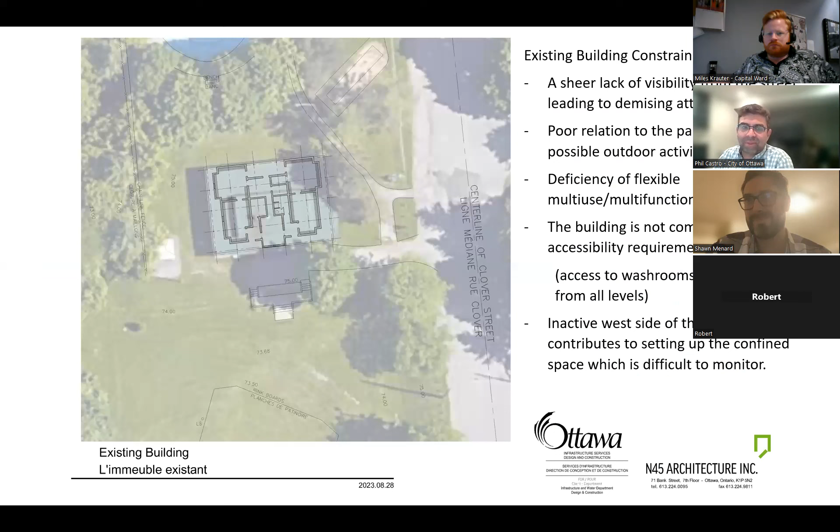From the park, the parking is almost non-existent along the edge of the road, and access to the pool to the north of the site, and the rink to the south. The site is sloped, which presents some challenges for accessibility, and I think we've addressed those, and we'll continue to look at that. We can switch to the next slide. We've worked on a lot of different options for this, and narrowed it down to three, which we think solve most of the issues with the site and access to the building, or access from the building to the park and recreation to the north, which is the pool.

There's some tennis courts, some play structures—a lot happening to the north of the site, and the rink in the winter to the south. The challenge for us was the connection to those existing facilities, and I think it's important. There's an opportunity to make a connection to the park around the site. It's really quite beautiful—the street is beautiful. There's the Sawmill Creek ravine to the west of the site.

But as a building on a site, it doesn't really respond to how buildings are used today. The space is compressed—internally, the ceiling heights aren't high, so it's not a particularly welcoming building, and certainly doesn't make use of natural light or access visually to the park.

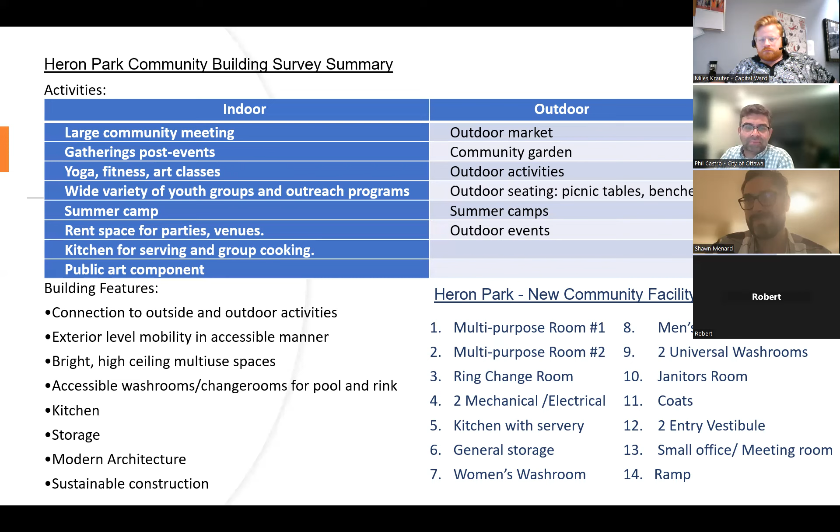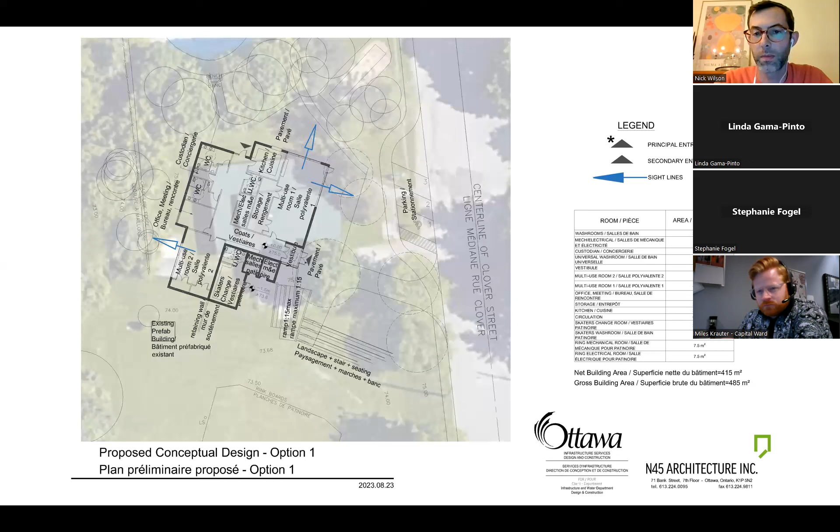If you want to raise your hand, by all means, raise your hand, because Nick, you nailed it, basically. If you look at the other ones, they sort of beg to have that kind of rollback door between them. So it was on the original plans, but like I said, they don't always do what they're supposed to do. They're expensive and they often break.

Yeah, I hear what you're saying there. You like constant maintenance and whatnot is not something we're after. So, which I kind of think of with the lobby as well. Do we need to have a separate lobby in the entrance, or is it better just to have bigger principal rooms? Lobbies have been hugely successful in all of our modern buildings.

It winds up being a stroller garage and a waiting room for parents. So we call it a lobby, but that doesn't mean there isn't a bench along it and hooks. So if there's an event going on, people will almost always wind up collecting in that lobby. And they do in some of our buildings that don't have those lobby spaces. Just as an example, there's a new field house in La Roche Park. Every single time I've been in there, and we've done multiple tours, we wind up spending the most time in the lobby. It's a truly bizarre thing that's been coming out, but that lobby space is almost disingenuous calling it a lobby. It's more like a de facto meeting room or gathering space, like a loading zone at the beginning.

Exactly. Yeah, cool. And then just two other quick comments and then I'll get out of the way. I think having seating there on the outside, close to the stairs, would be great. People do use the benches there a lot that overlook the field. I noticed that one of the options didn't have a seating area there. And then I think having the kitchen on the field side instead of the pool side would probably be most functional for the type of events that we tend to have.

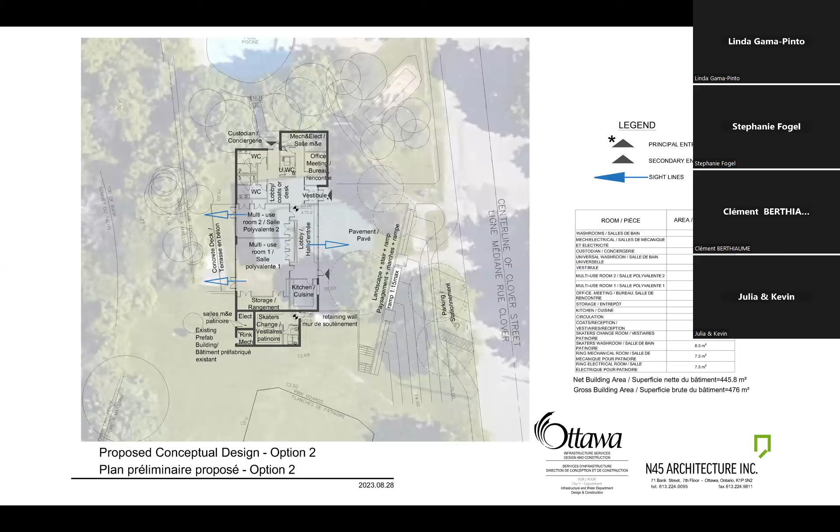So if the office was located in that corner - the southeast corner - with a window overlooking the rink, then the rink guard could sit in the office and keep an eye on the games and the skaters to ensure things are safe, and count participants without constantly having to go outside. That's kind of the orientation and a real necessity for this to be useful and functional for rink maintenance.

Also there isn't any indication of where the water supply would be, and that may be outside the scope of this, but we really need to ensure there's water supply both for flooding the rink and for the pool people, who need water supply to be able to clean the pool.

And finally, if we're doing this, it would be super to have an outdoor water fountain for people. Currently we have no water fountain or access to drinkable water when the building is closed, and that would be a lovely thing to have in the spring and fall when the building is closed.

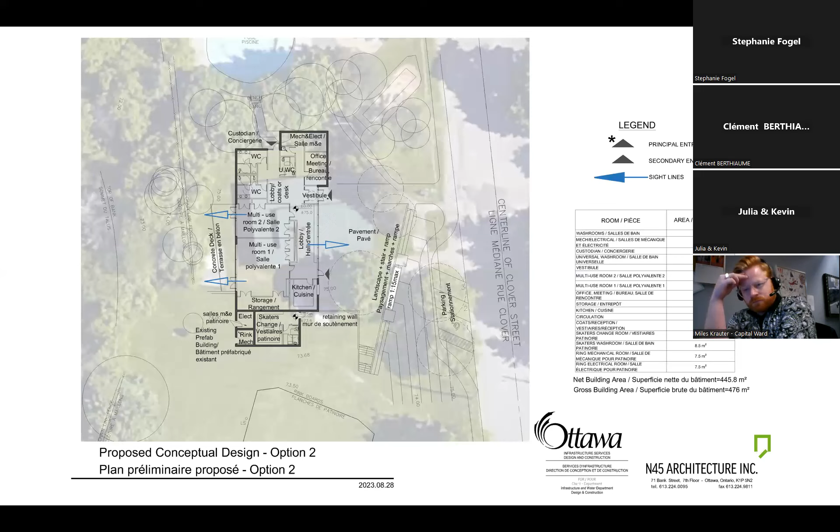That factors in the pool and the spaces, the multi-purpose rooms. And if we go with a universal washroom instead of what they provided there, then we would require even more space, I believe, to get the same number of water fixtures or water closets, toilets. So that would bump the cost up potentially a little bit as well - just something to think about.

Okay, Phil, I know there's more to address there, so back to you. Yeah sure, I mean the child toilets - I love that idea, I have 2 little ones myself, and if we can figure out how to do that, I definitely mark that down.

Room for the lockers - funny thing, you're not the first one to tell me that. The city staff member in charge of the lifeguards, that's actually what he said - he said, my lifeguards need lockers. And I said, oh okay, I guess currently they just kind of dump their stuff in there. They may actually have lockers as well, so either in the form of millwork or a more traditional metal locker, those are going to be included. Good catch. And while obviously the lifeguards would be using those during the day or while they're on duty, those would be available for public use at other times during the day.

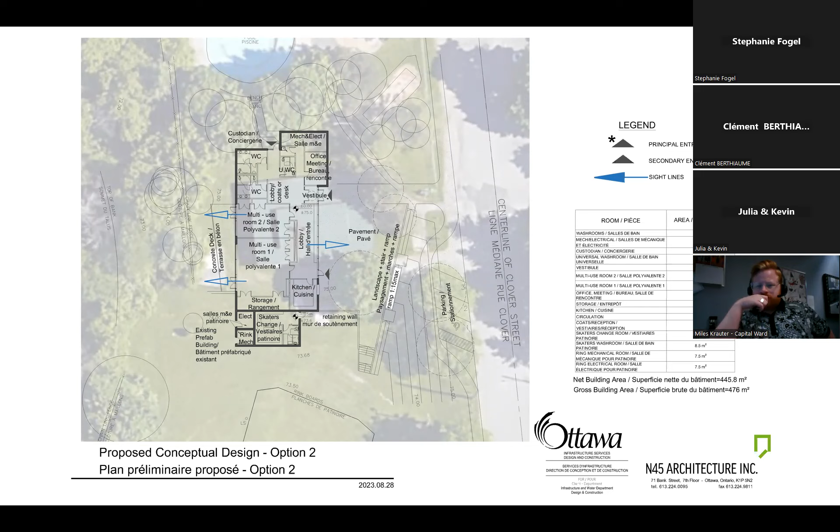The window to the office. So for the rink attendant, the window will be down in the change room. The rink attendant most likely won't be up top. They won't have a key to the entire field house, just a key to the skate change room, and we'll accommodate them with a window and a small desk to do homework, or if they want to bring a laptop or something else, whatever it is that they need.

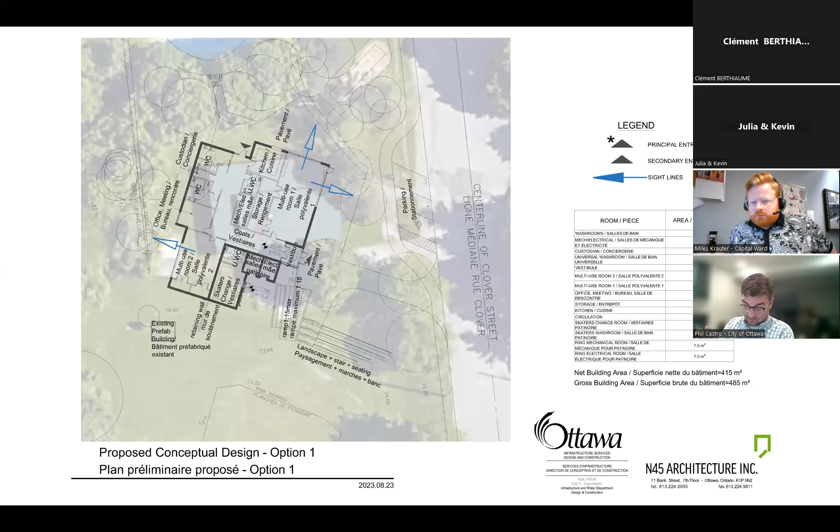And I think, yeah, that's it for Stephanie and Ben, but I did write everything down, and we're going to take all that forward. So thank you for that. Thank you, Phil, for that, and Stephanie and Ben for the thoughtful intervention as well.

Next on the speakers list, I can see Clément. Clément, please go ahead. Hi, thanks to everyone for all these great efforts.

I think perhaps it should be made more clear what the universal washroom is, as opposed to a single stall direct access. Stephanie made comments about that, so that people can have a clearer idea of, I guess, a greater capacity in those cases where, for example, the yoga classes might be of all one gender that might all want to use the washrooms all at once. So that's a bit of an aside there.

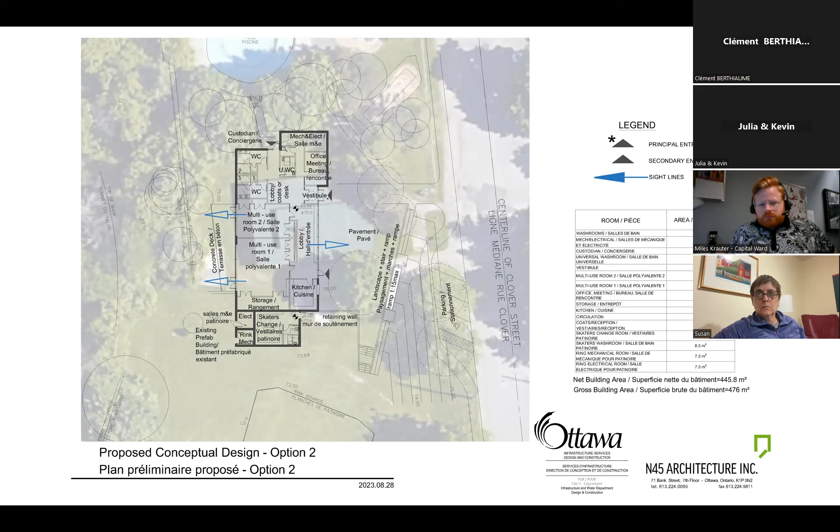In option 2, there was mention of a podium adjacent to the retaining wall for overview of the skating area. Is there also a podium intended in versions 1 and 3? And given that it might be available there in option 2, was there any thought to making that a bit bigger than would normally be the minimal size, in order to allow it to be used as a stage? Given the natural stadium on the east side of the whole extent of Clover, as a possible eventual use for youth plays or whatever other activities they might want to have there, for small concerts or whatever.

Also, there hasn't been any mention of this, although Jay had very good comments about using this as a destination in instances of problem weather. Is the intent of this building to be one that is resilient and can resist intemperate or extreme weather?

And has any thought been given in the eventual harder fixed design to taking advantage of the south facing clear treeless areas of the rink and the field, in order to be able to harvest either solar from photovoltaic or a little bit of extra heat? If we're looking at heat pumps for the heating system, number one, is it going to be air conditioning? And if it is going to be air conditioned, then if heat pumps are going to be used for heat in the winter, we can maybe take advantage of making the pool season longer by, in the summertime, using the heat pump to dump excess heat directly into the pool.

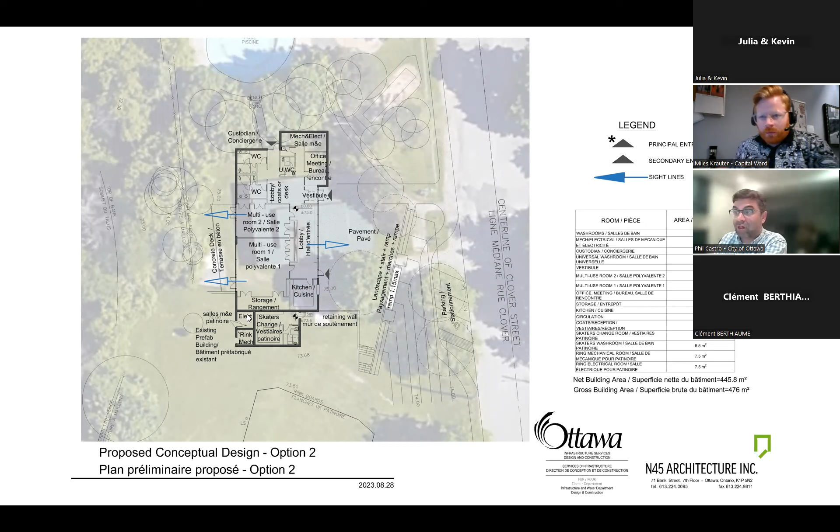I think we'll be able to catch sunlight from the second story coming in from the south across the building, just due to the differences in grade change. I'm not sure exactly where those windows will land. In the option we're looking at now, there's a closet that would be in the way, but in some of the other options it would work a little better.

Also, there's an opportunity for a green audit. The city has some funding available for buildings to be audited for green features before construction. So we'll most likely take advantage of that to see what else we can do to incorporate green features in the building from the get-go, and also future-proof it.

Going back to the rooftop, unfortunately, as you probably know, the waterproofing can become cost prohibitive. If we were to use the roof for the skate change area, it would have to be appropriately waterproofed, appropriately decked, and a railing would have to be incorporated. All of those things may seem small, but they quickly add up to a very large expense. That's why, when we were discussing things, Phil, we decided to ditch the idea of a waterproofed deck over the change area.

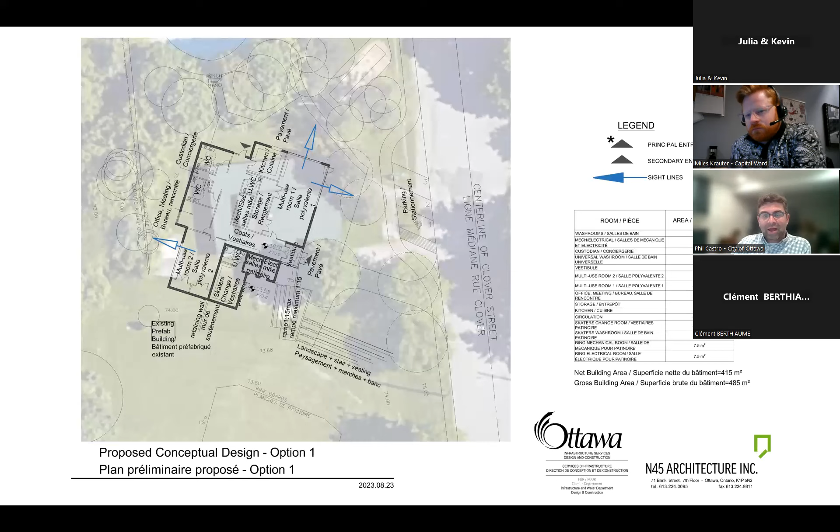It was mentioned, I think by John or Robert, about that podium area on the exterior, where there's kind of a retaining wall in this area looking down. Yeah, I noted that one too. That one caught my eye as well.

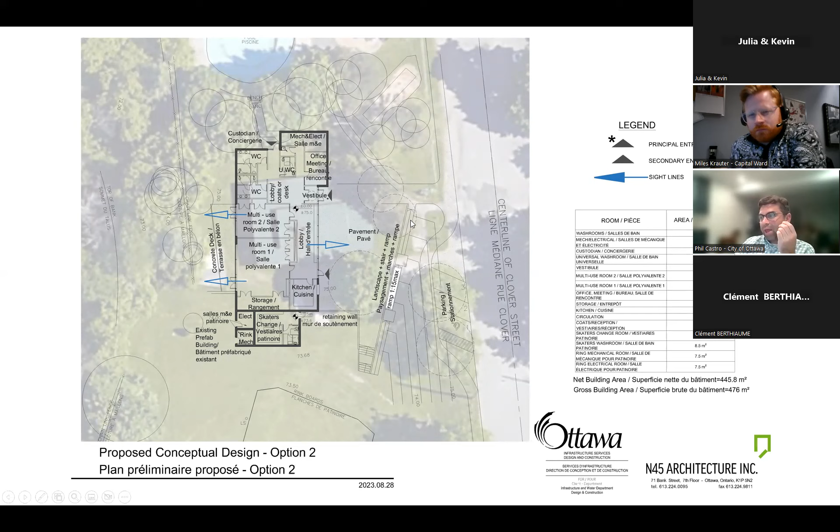The ramp may not be the best ramp, but the use of that retaining wall is nice. In one of the other options, there's kind of an amphitheater effect, where the ramp zigzags back and forth with large steps in between, creating a natural amphitheater seating. Both are appealing.

The thought is there, a bit of tweaking would take care of that right away. Thanks for that helpful exchange, Phil and Clément.

Julia and Kevin, I see your hand next. After we hear from you, I'll also look at some of the comments in the chat. Phil, I know you can save those on your end, and we can too, so you can review them later. I'll provide a summary of anything we've missed. Julia and Kevin, please go ahead.

Hi, so I have a question, then I have some comments. The first question is, how much bigger is this supposed to be than the existing field house?

That's a great question. Robert, I don't know if you're still there, but I was hoping you could also touch on the size of these multi-use rooms. Yeah, that's kind of where I was going to go with this too. I'm still here. I can't tell you exactly how much bigger it is, but it is bigger.

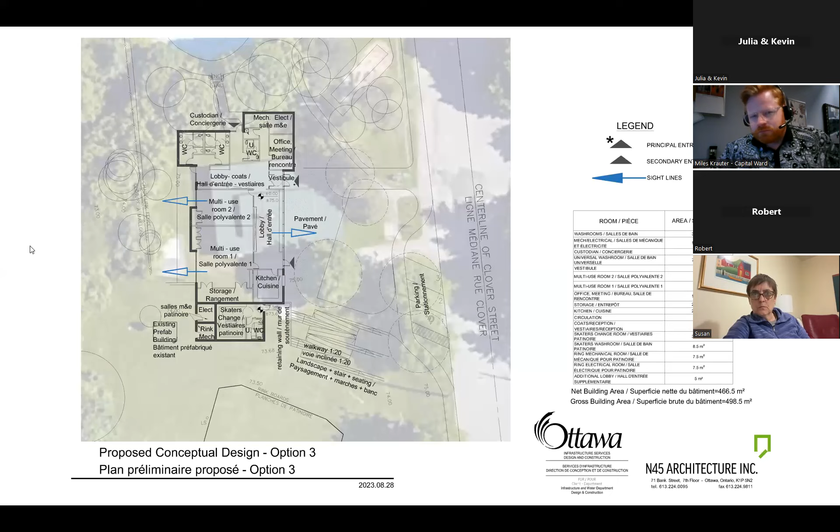Room number 2, in loose chairs in rows with a speaker at one end, could seat about 68 people, and if seated at tables, about 50 people. So they're good sized rooms—they may look small, but they're actually very efficient and generous in size.

If I could comment on the washrooms, if you look at any one of the universal washrooms, it's just slightly smaller than half of a typical washroom. From a building code perspective, we have to design to the number of people that could use the building, so we have 3 fixtures per sex. We would need considerably larger area to accommodate universal washrooms, and they all would have to be accessible.

Okay, and Julia and Kevin, I think there was some comments beyond those questions, so please go ahead.

Yes, so my first comment is I think the angle of option 1 is kind of interesting, and I've heard that one reduces tree loss the most. But my question would be, does that angle have anything to do with anything else, or is it just a random angle picked and dropped onto the site? How does that building interact with the site on that angle?

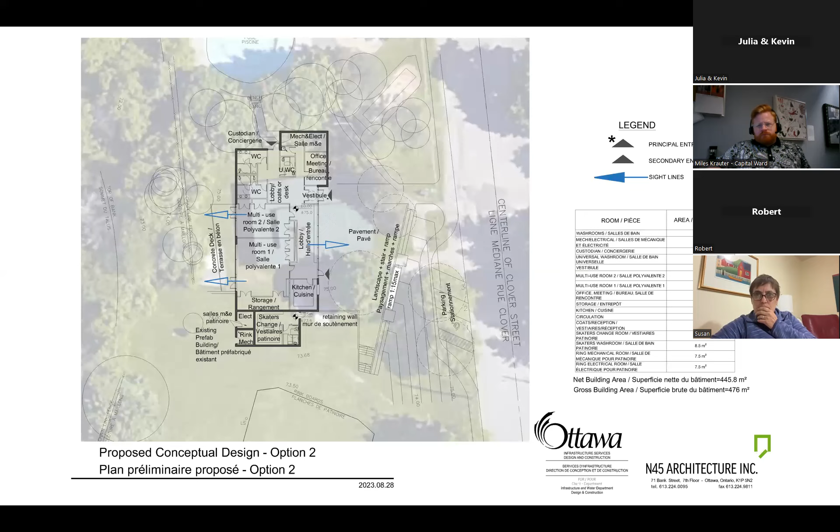Okay, Phil, did you want to comment on any of that before we move on?

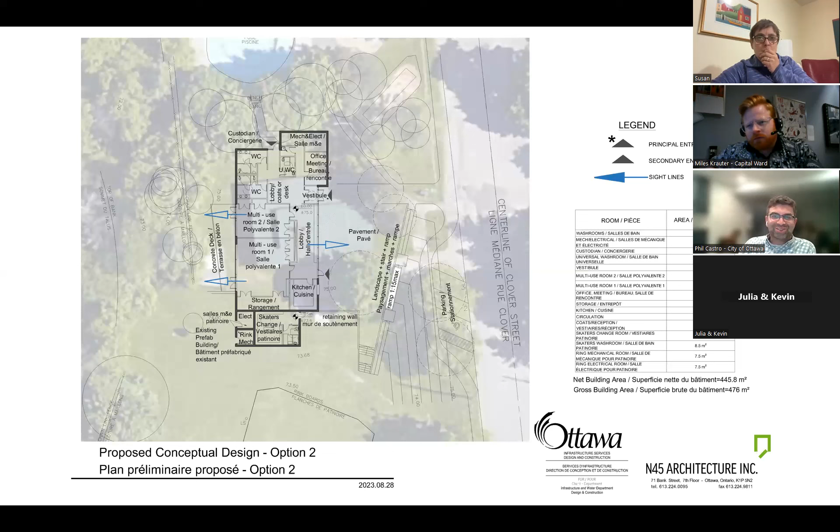Well, you made me think of something: barbecue storage. I was imagining the barbecue happening, and then where the heck does this barbecue go? So I've made a note of that. The windows, I mean, to Sawmill Creek, it's one of those major components we're going to really have to put some thought into.

I also love that you use the lens of: it's important how we use the building now, but how are we going to use the building in the future? City staff was very interested as well in what the future of this building would hold. If we're starting to do all of this, what are the limitations of this building? We're hoping there won't be that many limitations for what the uses of the building can be, which is kind of what this whole planning process is all about.

The angle, that's a great question. Robert, if you're still there, was that to avoid the trees? Was that a conscious effort? It was absolutely. The other two schemes are longer, and they cut in more into the north end of the site. If you look at scheme one, option one, it kind of nestles in amongst all those trees, so it's pretty nice. Unfortunately, we didn't put a north arrow on this site plan, and generally it's to the north, so it's slightly north, southwest a little bit.

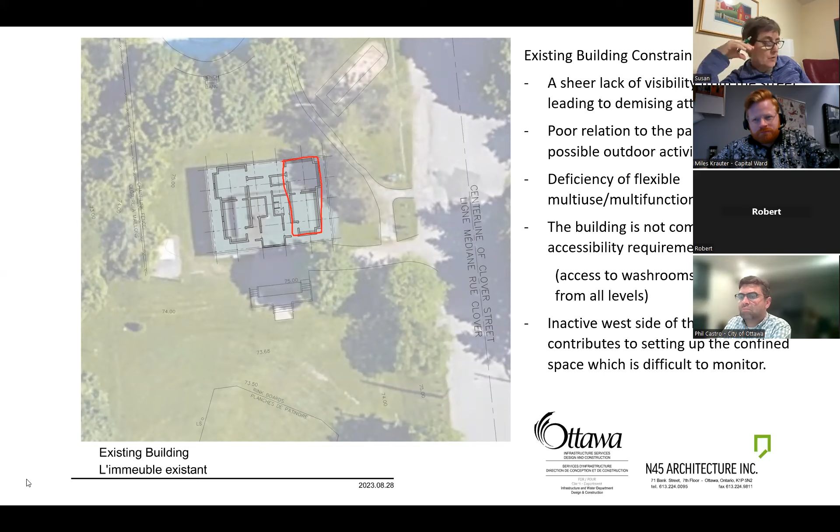Oh, well, by code, up to 100 in loose chairs like you'd put up in a classroom. Okay, because I think the comments around the one meeting room are a result of the small meeting rooms we have and the need for a large meeting room to accommodate 40 or upward people, because our maximum AGM numbers were under 40, and we usually hold that at another venue because we can't fit everybody into the current field house. So I wanted to clarify that, because it seems like quite a big space if you can put 100 or 90 people in.

The other comment is with respect to fewer washrooms. Again, I think those are stemming from the need to maximize the amount of meeting space we have, because the meeting space is really important. That's where I think the current field house doesn't meet our needs the most, trying to get a space big enough to accommodate even our current meetings, let alone future meetings, as Julia said.

My other comment was in terms of the office meeting space, and again this is generated from trying to maximize general meeting space - I'm wondering, and people please react, do we really need a meeting room or an office room? Or could that, on the design, be a third meeting room with some office space for storage, like a few file cabinets?

And that's the idea, Susan. Sorry to jump in - so when I met with other parks and facilities staff, essentially that is what may wind up becoming the locker room. So yes, but there's the potential for two different city storage uses in the future.

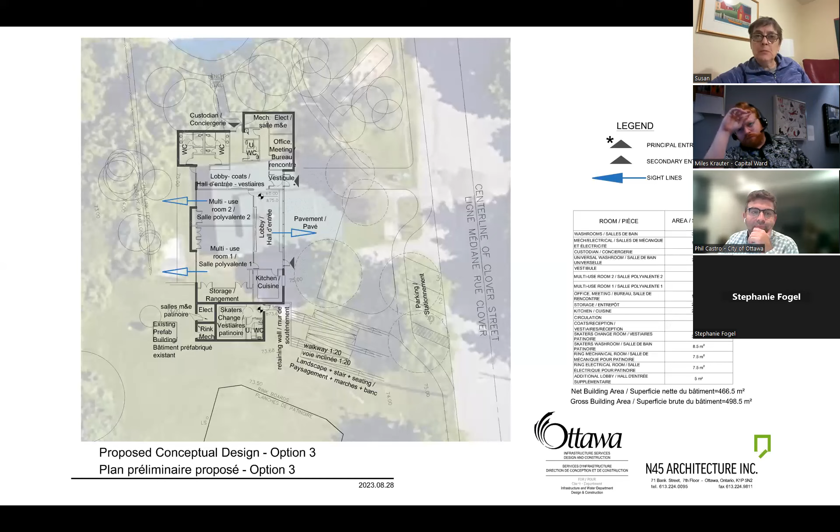And so if that were to be a third meeting room, how many people might that accommodate? So that little one looks to be about 20 square meters - that's pretty big. I mean, once lockers and millwork go in, if it's cubbies and not like a metal locker with a lock, or just cubbies with a little box on the bottom for shoes, that begins to eat the space away.

But that may be what winds up happening - it just winds up being a desk with these cubbies that go around the room, not necessarily a change room, just more a personal belonging storage room. Okay, and the other question I had was, since it's on two different levels, is it possible to build the top level out over the skating change room area, to expand the footprint of the top level?

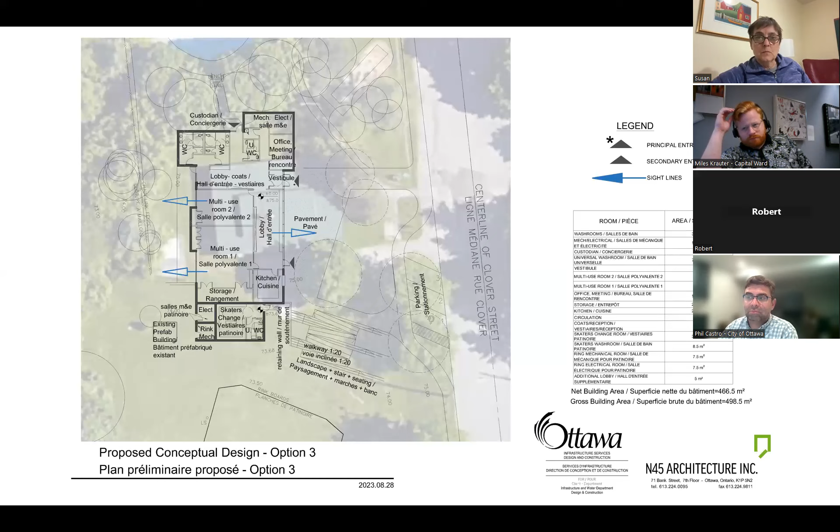Well, it's Robert speaking. So nothing's impossible, but there's only about a 5-foot grade difference. So the upper level would have to go up, probably 5 or 6 feet above where it currently is. So you'd be having to ramp up into the building. Right, so it doesn't really make sense.

Okay, so that kind of matches my earlier comment, where we don't know where the windows on the second floor are going to wind up, because we don't know how tall that lower area is going to be exactly. It might be kind of like a half story.

Is that possible then, if that's maybe out of the question, to make that into some kind of a balcony or canopy, like a place where people can go outside from one of the meeting rooms, to use that as a deck or a viewing area that's outside?

Well, again, it's accessibility. So the roof of the skates change vestibule or room would be higher than the existing grade, so you'd have to go up to it to use it as a deck. And to go up to it, we would need a stair and an elevator to make it accessible. Right, and we had talked about in an earlier meeting about trying to avoid elevators. Yeah, because of the cost, they're very expensive.

Okay, but I was going to just mention, if you went back to schemes 2 or 3, Phil - I know the preference is scheme 1, but when I look at the office meeting room, the discussion about using it as a meeting room, in terms of efficiency, you can slap my hands if you want.

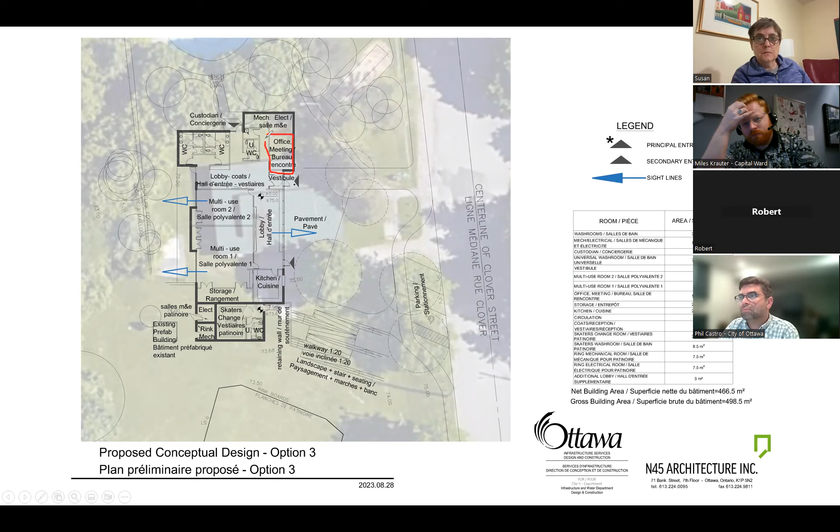If I had the mechanical and electrical room accessed from inside the meeting room and the janitor's closet, then I would capture the corridor as part of the meeting room space. That room would get even bigger.

Oh, you mean this? Well, the whole corridor, actually. Oh, because the water closet's on the... oh yeah, okay. So I would capture all of that into the office meeting area. So the room is about 200 square feet. We'd be adding another 75 square feet to it. Becomes a pretty nice room.

So then you'd have room for lockers and a meeting table, and a slop sink in the corner, and you'd access the janitor's closet and the M&E room from inside the meeting room. Wait, so the sink wouldn't actually be... okay, no. Or again, I can replan that - the access to the janitor's closet could be from the other corridor.

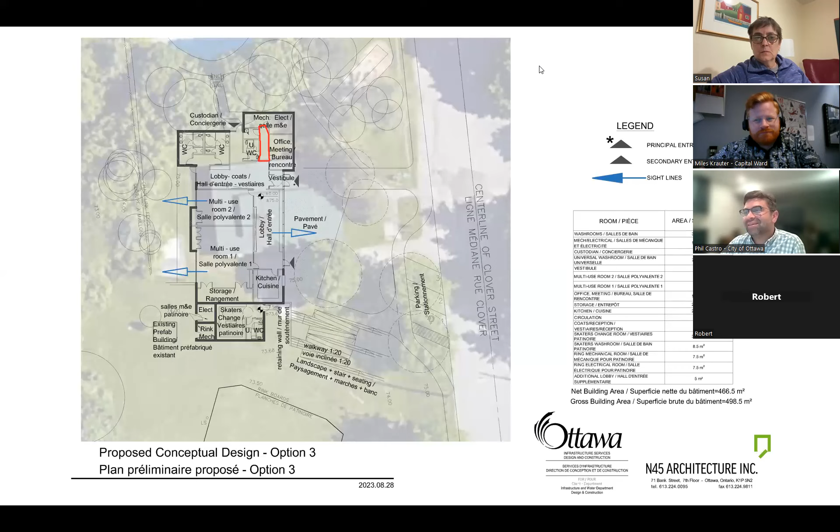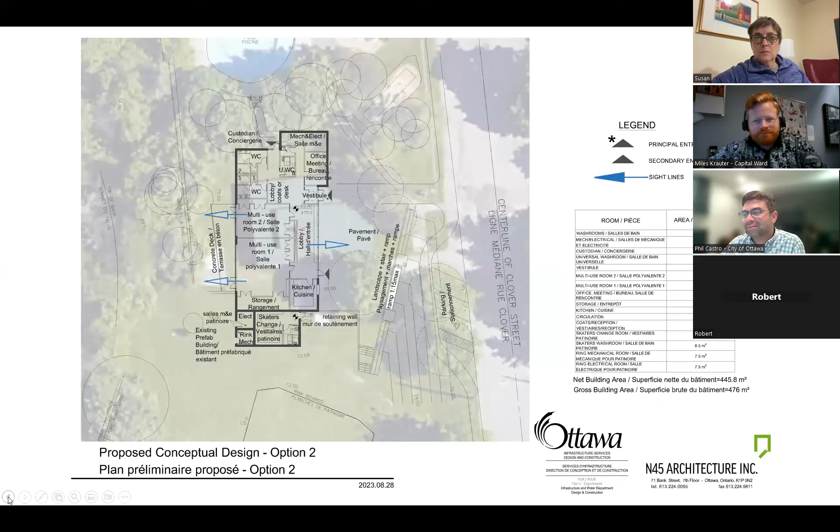But there's potential there for better planning on this particular scheme, and maybe opportunities on scheme 1 and 2 or 3 as well. Okay, good ideas coming from the meeting tonight, folks.

Definitely, definitely. Okay, so the other thing, I just want to go back to the bathrooms, the washrooms. And you're saying that the number of washrooms is really dictated by the capacity of the building. Correct. So what you're saying is we need 3 bathrooms on the top to accommodate approximately 90 to 100 people if it was at full capacity.

Well, actually what you need - there's 2 fixtures in each section, 2 in the male and 2 fixtures in the female, and 1 universal. A universal washroom, according to the building code, counts for 2. So in fact, there's a need for the equivalent of 6 fixtures to satisfy this building on the upper level.

Okay, 6 fixtures. So is it possible to not have male and female and just have anybody access those - keep the universal, but have the others not gender specific? Well, the answer is anything's possible. I just have to make sure that I have the privacy, I guess, in the stalls to make them non-gender specific.

So each bathroom has 2 stalls is what you're saying, so it's stalls as opposed to individual bathrooms. I see, okay. Well, and Robert, I think maybe another point - I'm not an architect by any means, so this is why I'm glad you're here - but if there are more smaller washrooms, they still need to be accessible, right? Absolutely, you still need the same accessibility.

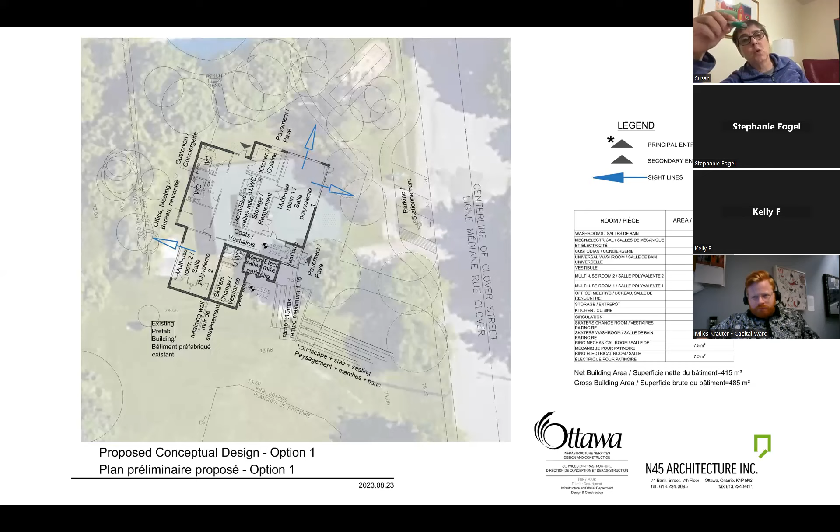I was looking at it, I thought this was like an individual washroom for men and an individual washroom for women, as opposed to 1 washroom for women with 2 stalls and 1 washroom for men with 2 stalls. So I was reading the diagram incorrectly. No, I have 1 washroom for men with 2 stalls and 1 for women with 2 stalls. Yes, now I understand that, but what I was saying before is that I only thought it was 1 room, 1 toilet, 1 sink for women, and the same for men. I didn't realize there were 2 stalls in each room. So that changes it for me, and I read that incorrectly.

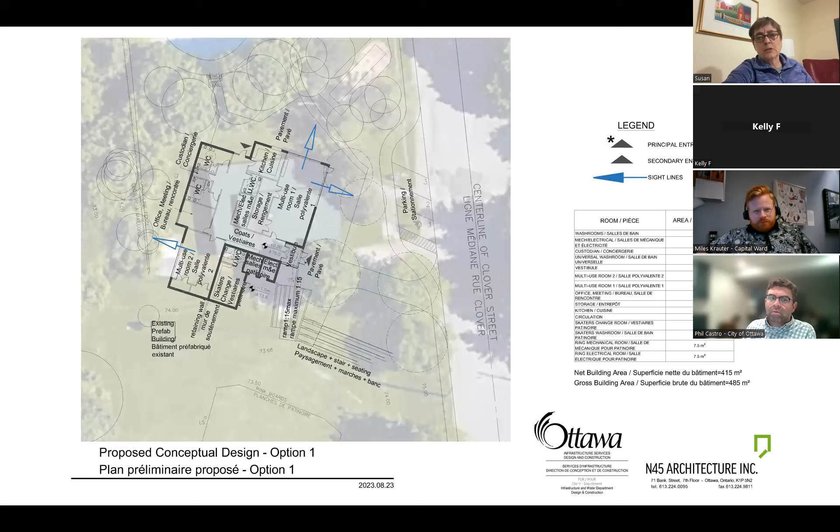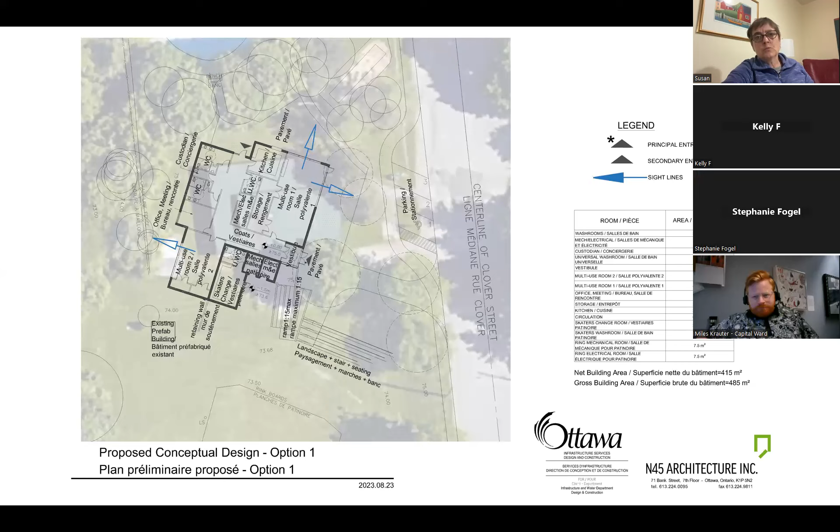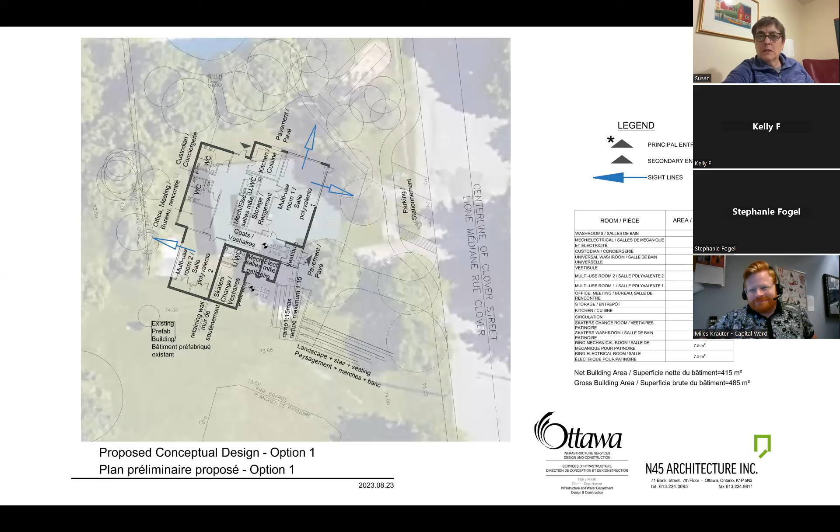But I'd like to support non-gendered specific washrooms, so that if there are 4 washrooms there, anybody can use them at any time, and you'd be able to use the universal washrooms too. So you're not having to, as we do at the NAC, have women wait in a long line out the door while the men get to go in with no lineup. I appreciate that for sure, if you can work that out.

And what was my other comment? Build out over the change room, I think I said that. We had talked also about having some kind of reception area or balcony off of the main, larger multi-use room, that you could move people to the outside, whether it's a deck or a patio with big doors. So in this particular scheme, room number 1, there is a door to the outside, we just haven't drawn any patio.

And then, so there's the door, and this is all kind of paved area, so people could gather as they see fit. The only thing we did identify, and this was another comment from city staff, was connecting the kitchen to the room directly. They liked it, but said if you need to get something into this room from the kitchen, you can pass it through, but if you're a person, you've got to go all the way around. So city staff caught that one, and said we just need a little cheater, like one of those half doors that open, basically anything to get people through.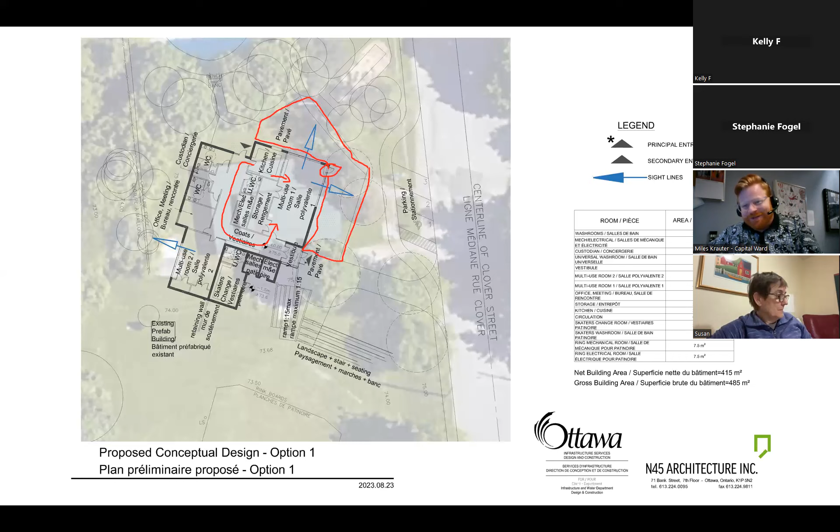Okay, I've got Kelly next. I don't think we've heard from you yet, Kelly, so please go ahead. Well, I know you guys want to go with option number 1 as the main one, but the only issue I have is where the kitchen's located. Is there any way to rotate that multi-purpose room and put the kitchen more towards the paved area, towards the parking lot there? Sure, I'm wondering, because with Randy doing his barbecuing and all that, it might be easier to be on that side with option 1 than having it on the far side, because it's really not giving us much access to it. We can do anything. Okay, and with the coats, is it possible to put lockers there instead of in the office, just have them along the wall?

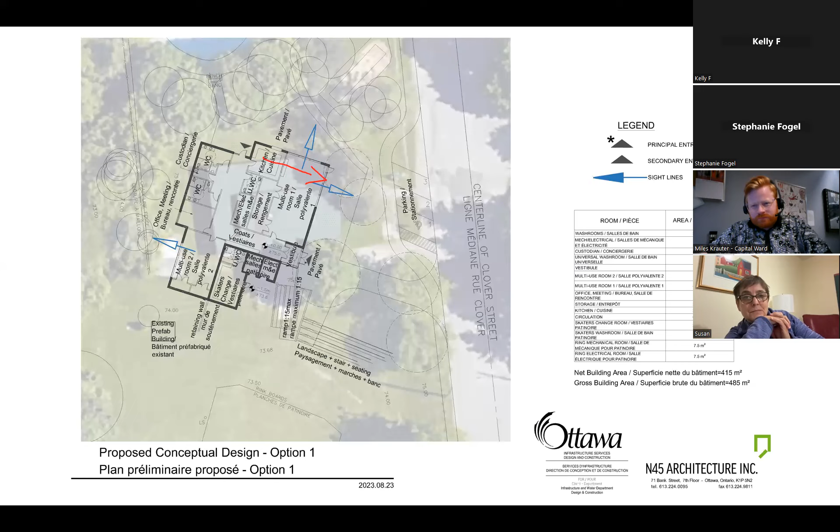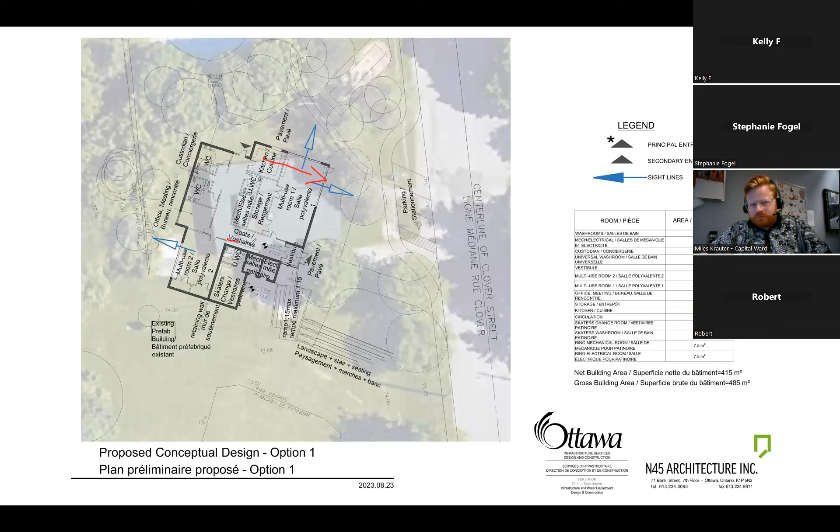Definitely, yeah. Is this a closet or is this a bench? Oh sorry, that's a bench. Yeah, so I was thinking of maybe just putting lockers there so it could be multi-used by everybody in the long run. That's just the two comments I had.

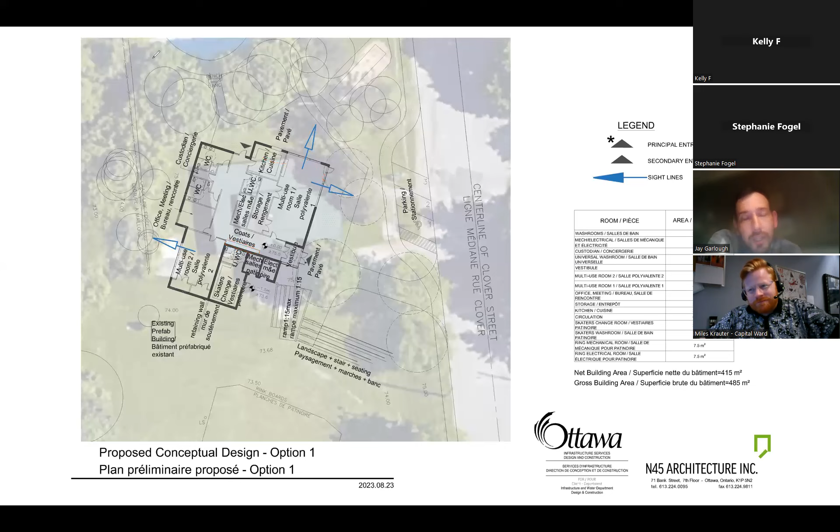Sorry about that, Stephanie, that's horrible, I didn't mean to cut you off. I'll go quick. I just don't see that this is big enough to even support our community when it gets built in 3 years. Our population is growing so much. I put in the comment the number of builds, we have like 725 units in addition to the 2,000 already in our community according to the last census, that will have people in them by the time this thing is built. We're already squished in there, it's not meeting our needs, we're going elsewhere for meetings. So my question in the comments was, what population did you base this on? Was it our current population or a future population?

If so, what population? I know this ship has probably sailed on that, but I see some of the other plans like number 1 and number 2 can sort of be extended on a bit of an angle, and it looked a lot larger, with larger gathering spaces so that 100 to 200 people could get into it if we needed to, for either an emergency situation where we can't breathe the air, or we can't have electricity, or we can't have heat, or protection from the heat. I don't see how that can work. I know it's not supposed to support our whole community association, but it'd be nice if the city of Ottawa, with the money we're investing in this, would actually build something that would be great for our community for more than just 3 years. Anyway, that's all I'm going to say on that.

It's a great comment, and the population, it's a great comment, and I really do understand it. Essentially, this is the replacement of the existing field house, but that's not sufficient.

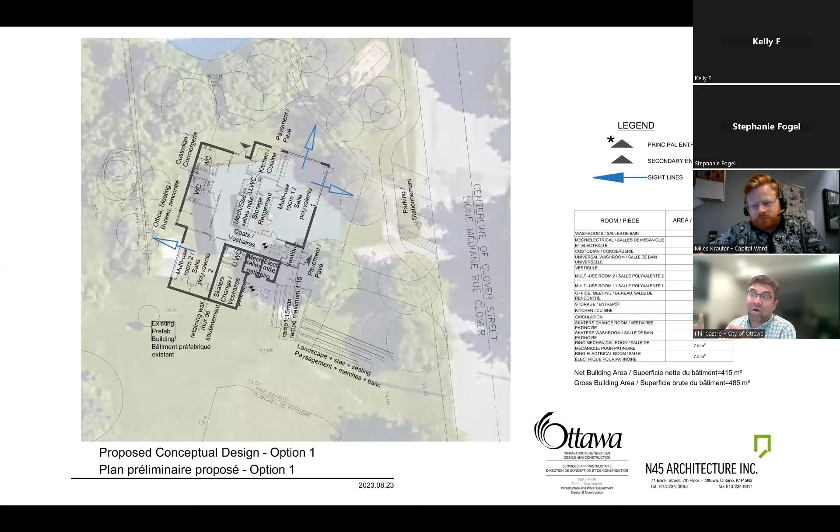Thanks, yeah, no, I know. And it's not that I disagree. It's just in this particular case, it's a replacement of the building, and what we are replacing it with is

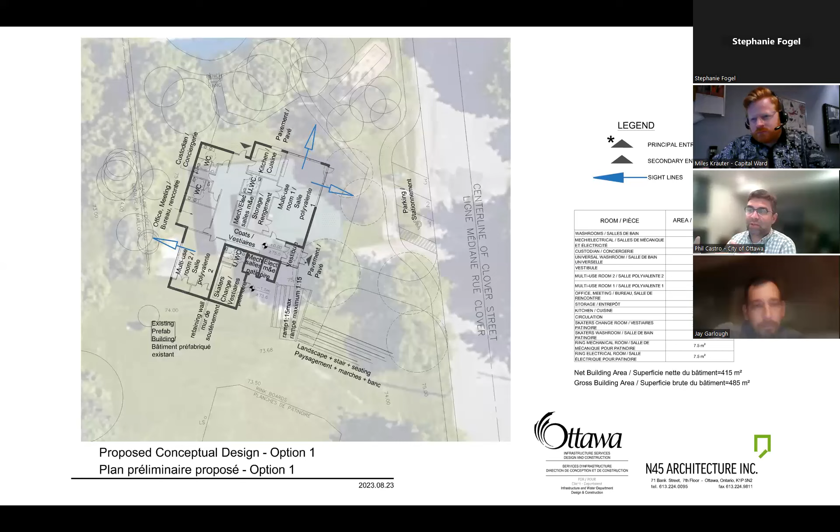hopefully going to be superior to what is there. As far as the space constraints, if you were looking for a bigger building, what amenities would we start having to lose and trade off within the park?

So it really does come back to a land issue and how the city and how the Parks Department, my department, goes about collecting land to accommodate the density that we're seeing and that we're feeling.

And it is something that we're working on in different avenues. But in this particular instance, we're looking to replace within the space that we have.

But I don't disagree with you. It's not falling on deaf ears by any means. I'm the Parks Department, and you know, you got the councillor here as well. We're all on the same side. Not to say you're preaching to the choir, but rest assured that we hear you, we see you, we understand.

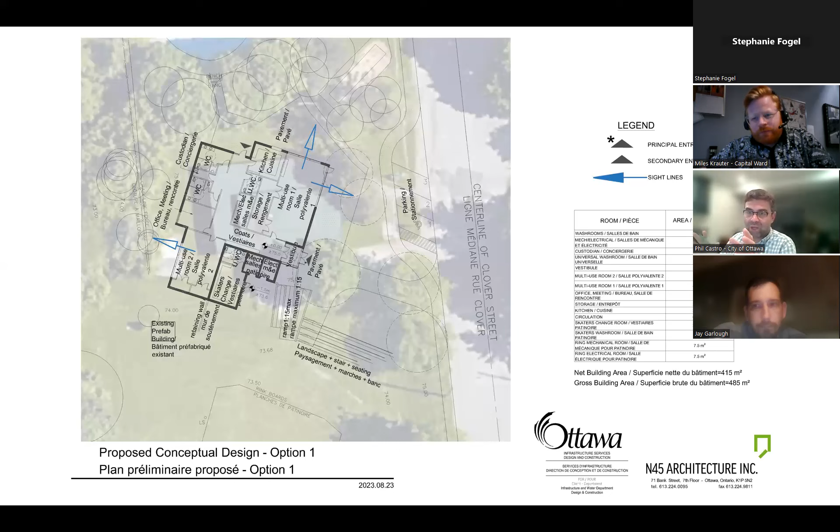And in other avenues, we're fighting for it as well.

Phil, just two things off of that. It might be helpful to get, and I think somebody asked this early on too, what the difference is in terms of the capacity for occupancy between what we have now and what's being proposed here.

It sounds like we're looking at doubling or more the occupancy numbers, so I don't know what those actual figures are, and I think that'd be helpful to hear.

And I just wanted to add, yeah, this should be a community center. Heron Park deserves a community center. The city's not funding it. Our office is frustrated that we have to fund most of this project through cash in lieu of parkland funds at the ward level.

The city budget should be funding this. It should have years ago when there was a plan to, and it should be doing it now.

But this is where we're at. We didn't want to wait any longer, so we've committed the funds from the ward level, which are very limited. So I just wanted to add that as well. But yeah, Jay, you're 100% correct.

The other communities in our ward have a community center. Why doesn't Heron Park? Anyways, look, I have Stephanie here.

Please go ahead, and then we'll wrap up after that. Yeah, just a couple of comments back to the washroom issue.